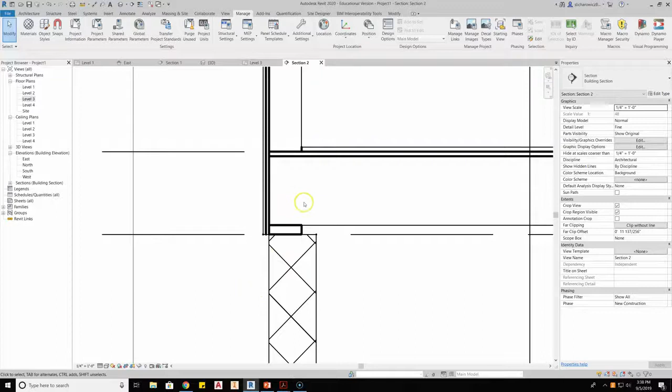Okay, in this video, I'm going to take you through how to set up a wall system and a floor system so that the wall and floor clean themselves up in a manner similar to that in which it would be constructed. So if you see here in the section view, this is our floor system, this is the floor joist. Then we have our subfloor that runs underneath of the wall.

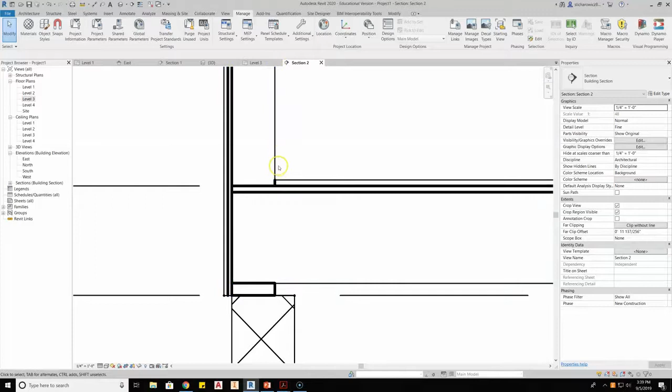Our wall comes down to sit with the stud, what would be the bottom plate, or the wall itself is sitting on the subfloor. Then our finished material is going to run across and stop at the stud layer. Now we can add a finish layer on the wall, and then these two would clean themselves up as well.

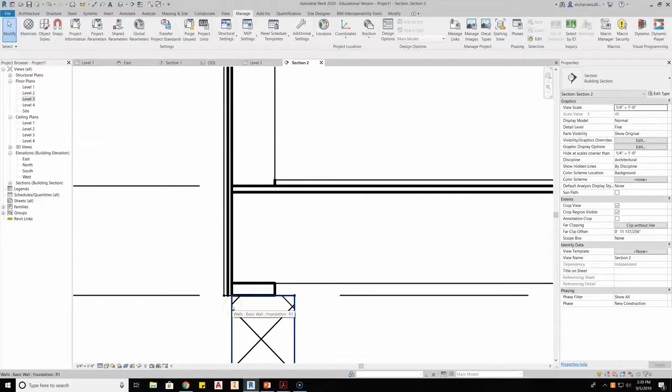But then more importantly, the outside, the sheathing layer, or OSB, is running down the wall, so that it is running down over the floor system and then down over top of the sill plate, stopping before the foundation, covering this up. And then of course siding is running down as well. So how do you go about setting this up so that you have a nice clean wall section?

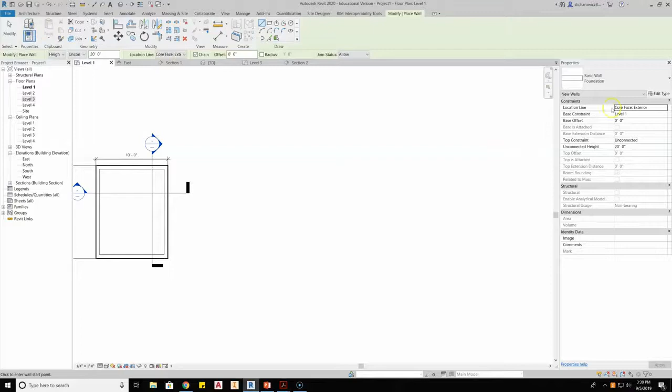So what I'm going to do is I'll run back here to my level 1 and just scoot on over here, and we'll draw this up here again. So I'm going to go to my architecture tab, grab my wall tool, and first grab my wall. I already have a wall built. We've covered building walls here before. We'll just take a look at the layers in my wall so we can see this.

And what I have here is siding, that clapboard siding on the outside. It's 1/2 inch thick. Then I have my OSB, and right now I just use the default standard 1/2 inch instead of a 7/16 for drawing purposes. And then the structural layer here, wood joist, rafter layer, batt insulation, is what I use for my stud for a 2x6 at 5.5.

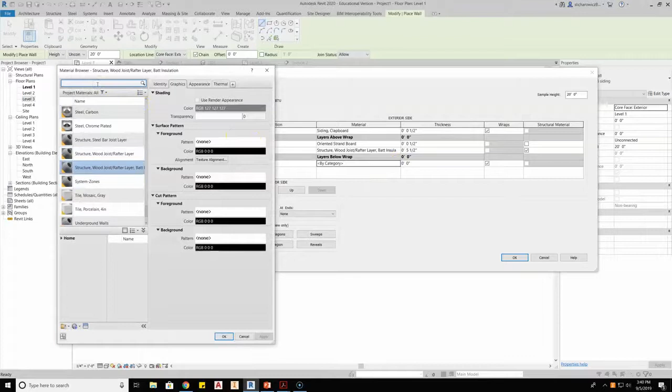And I'll just go ahead and add in one more layer here and drop this layer down, so if we wanted to show a finish layer on the inside of the wall, I can do that. I'll add a finish layer, and we'll make this gypsum wallboard. So we'll go find gypsum wallboard. There it is. And we'll make that a 1/2 inch gypsum wallboard. So apply, hit OK. Now we'll go ahead and just start drafting in our lines.

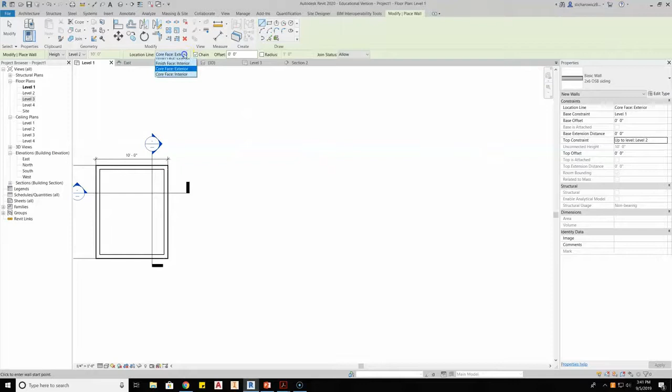And right now I want to set this up so that the base constraint is my level 1, and my top constraint is going to be my level 2. So that's set up. So now core face exterior is what I'm drawing by. So we'll just run out here 10 feet, and we'll just keep this pretty small, 10 feet all around, and clean this back up. So now I'm ready to start working with my floor.

And now I'll go back to my architecture tab, and I'll grab my floor system, and we'll do a floor architecture. And I had already altered this floor generic 12 inch so that I have some layers. So we'll jump into here and see the layers that I have. So first layer I have is a finish layer, and I didn't give any finished material to it. If I wanted to pull oak, I could do that, but that 3/4 inch thick is important.

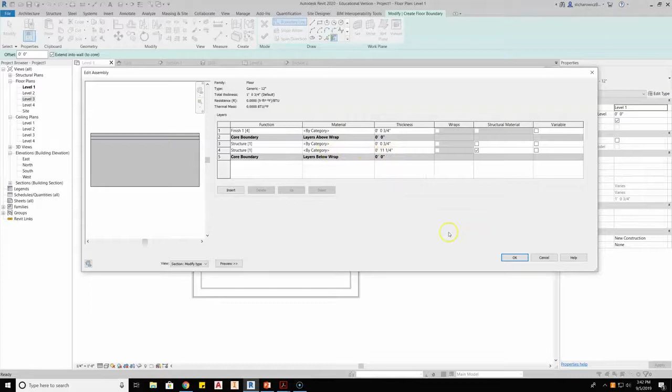And then the next layer, this would be my OSB, or my subfloor layer, sorry. My subfloor layer, and that's your 3/4 inch. And then my joist layer is 11 1/4, what would be a 2x12. So with that set up, we'll go ahead and start drawing. I'll just actually select the wall, so it grabs that.

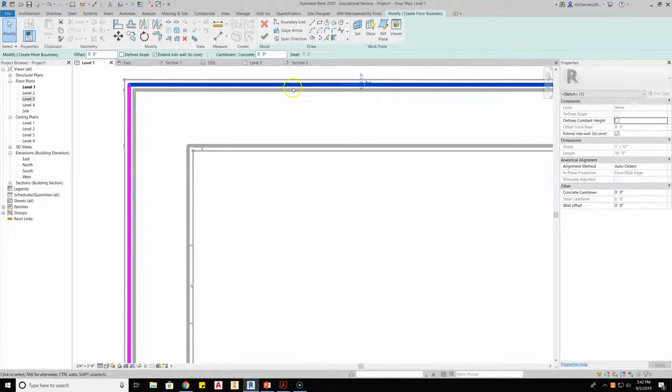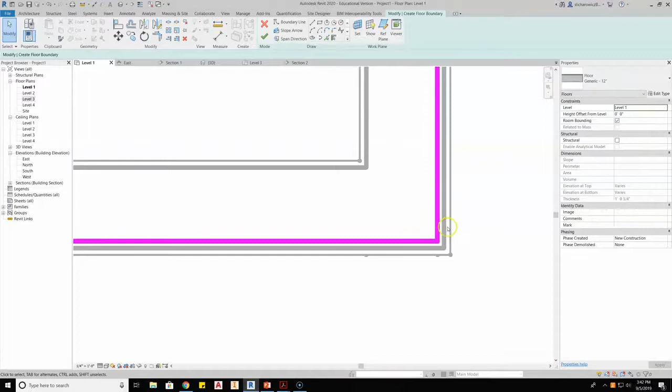But what I want to do now is come back in, hit escape here twice, and then grab this wall indicator line. I want to pull that in so it goes underneath of the stud. Do not want that over top of the sheathing layer, or under the sheathing layer. So I'll go to the 2 corners, and I will pull that in so it is between the stud layer and the sheathing layer on the outside. So it's underneath. So it's my sheathing and then my siding outside. So now I'm going to go ahead and hit the green check.

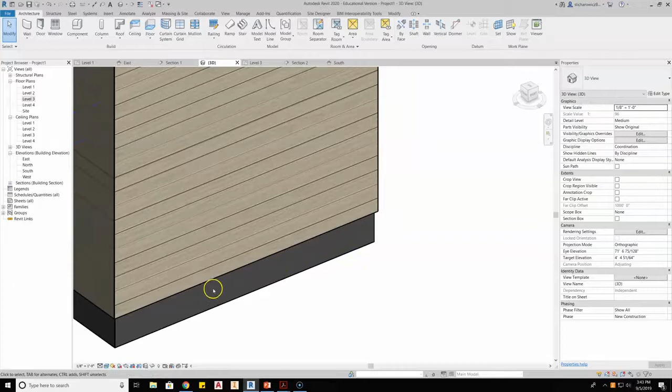Now with the green check, what this is probably going to set up is a pretty standard floor system. What I'll do is I'm going to go ahead and take a look at this, and you can see that I can still see the floor system itself underneath of my wall. And this is what we've done for years now, is then try to clean this up and how to handle that, because really the siding would run down across that exterior of the floor system.

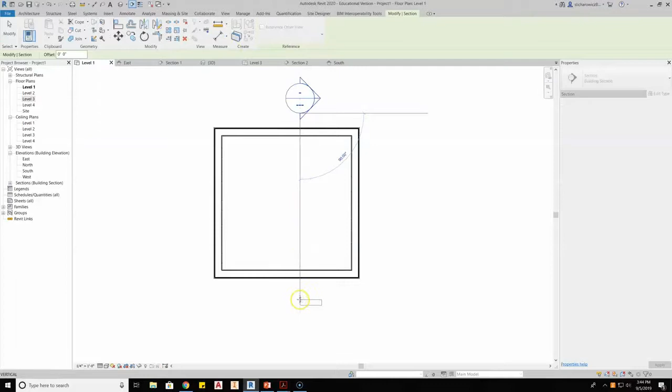So what I'm going to do is I'm going to run back to my first floor here, and I'm going to grab my view tab. I'm going to just create a quick section here so I can cut this building in half and pull this back. So I'm just making that section there. Let's go ahead and take a look at this, and we'll set my detail level as well, and you can see that the wall is sitting on top of the finished material. So again, that's not accurate either.

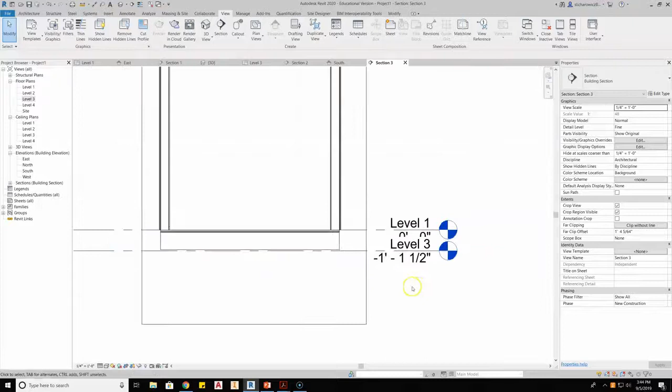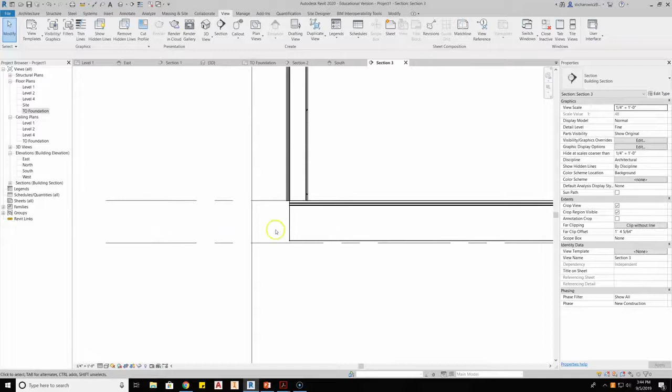So what we want to do is we want the walls to actually run down through to what would be, this is that level 3. And in fact, really, this should be called my TO foundation. So we'll go ahead and call that TO foundation, meaning top of foundation, because it's really where the end of my foundation would sit. And I'm going to have a sill plate in between the two of these. Okay, so we'll end up adjusting a few things with the height of the floor here, but we'll start working through this.

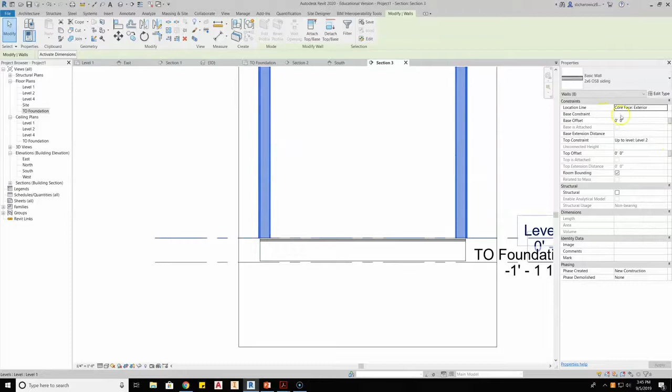So what I want to do next is I want to end up having all my walls apply and attach down to that top of foundation. So I grab one wall, I'll then right click, I'm going to grab select all instances in the entire project right now, and then I'm going to go ahead and set my base constraint. So my base constraint goes to the top of foundation. Come back inside the drawing, click, and now that drives those walls down through.

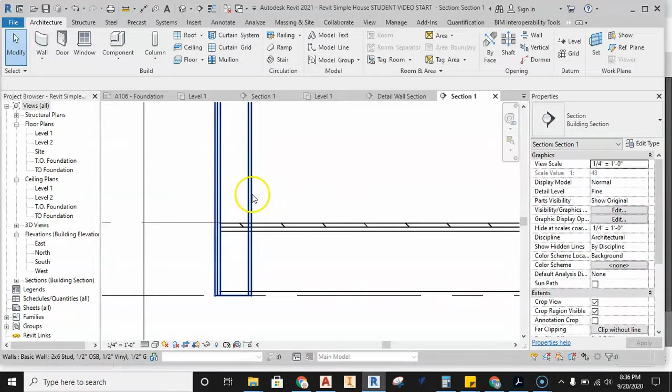So now what we can do to get the wall and the floor to join up and clean up in a proper manner is we're going to go ahead and select one of the two features here. I can go ahead and select the floor or the wall. What we're trying to do is get to that modify toolbar. So just go ahead and click on one of them, and then this modify toolbar opens up. And I'm going to grab this join tool. Now the join tool is join, unjoin, or switch join order. So what I'm going to do right away here is go ahead and click on the join geometry.

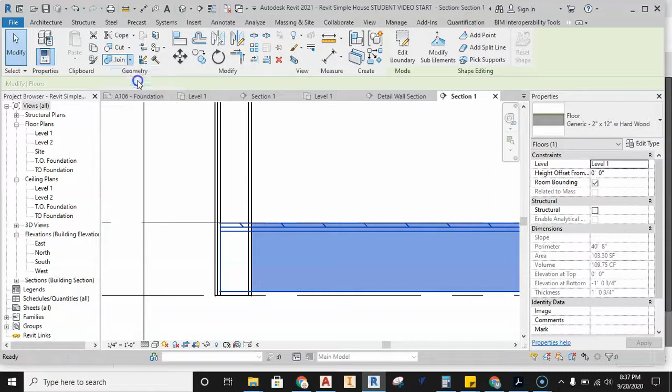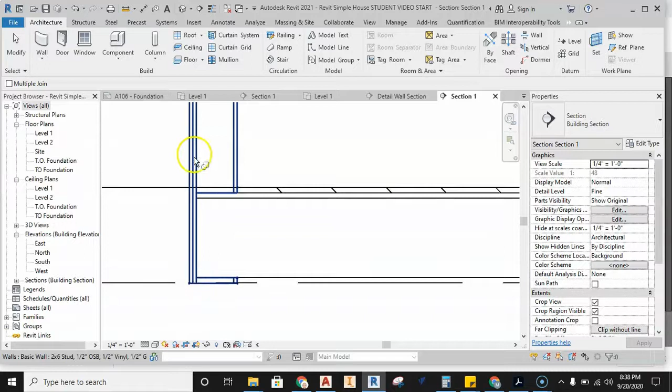And with the join geometry tool turned on, we're going to come down, we're going to select the floor, and then we're going to go ahead and select the wall. And you can see that it goes ahead and cleans itself up pretty quick, that the subfloor is now running underneath of what would be the wall sitting on the first floor. And then you can see that the sheathing and the siding are running down past. So we'll just go ahead, we'll do this to the other wall over here and go ahead and hit it that way. So that's the way you set this up in a section, where you join the walls in a section.

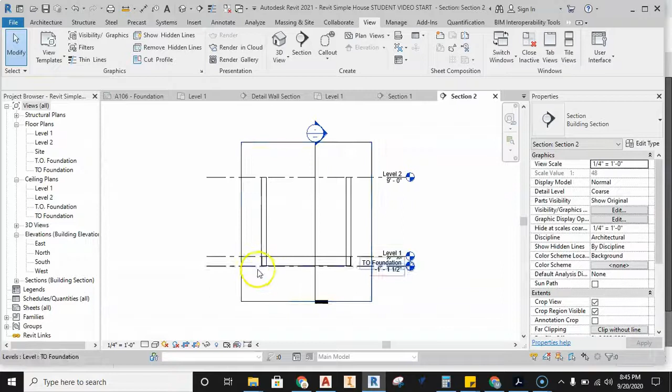What we can also do is jump back to our level 1, and I'll go ahead and create another quick section here. Pull that back. We'll go take a look at that section. You can see that these walls have not joined up. So we'll go ahead and actually make that fine. You can see these are running through here and these are running through, not cleaning up.

So we'll go back to that level 1. And if I'm able to select that floor, now what you might have to do here, this is the select element by face button. If there's a little red X down here, you've got to click on that. Then you can click on the floor. That's pretty important to do so you can grab a hold of a flat surface.

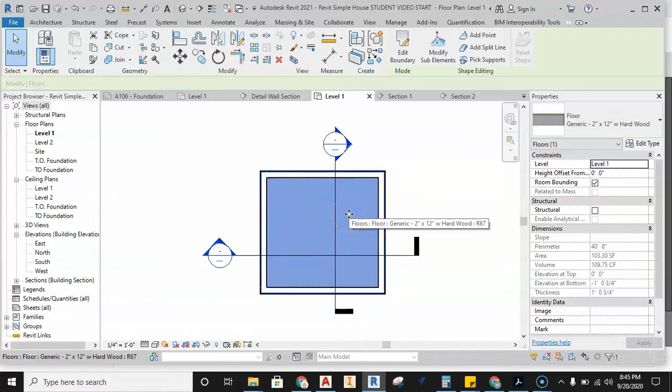But by doing this, I can grab the floor, I can then grab the join tool, and then I can go ahead and click on the wall and then the floor. And then what that'll do is set up the join for those walls without having to have multiple section views present. So you can see now in that section it is cleaned up.

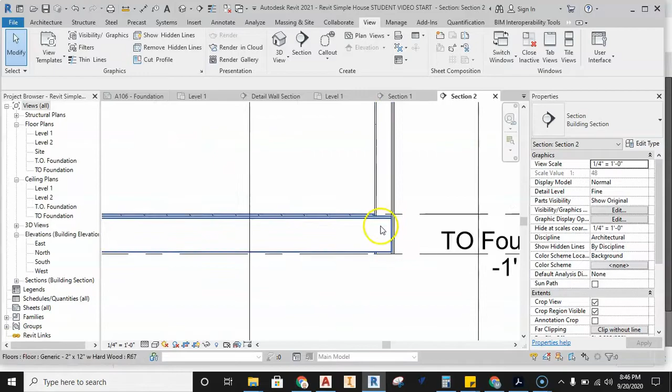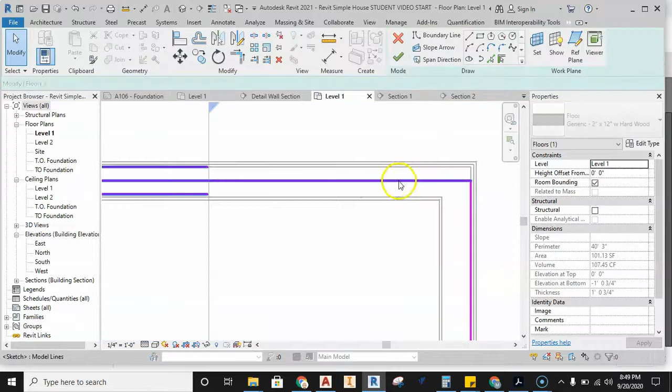Okay, and another way that you can actually work through this, you might see this, is if you were to, let's just say, select our floor here, and I hit the edit boundary button up here. And I go ahead and pull my boundary out and hit the green check, and then I'm going to go back and edit the boundary again. I go ahead and push this boundary back, and then I hit my green check again.

Then what will happen is you get a dialog box. And this is what I want to see pop up. Once you take those walls down through the floor, you get this dialog. It says the floor/roof overlaps the highlighted walls. Would you like to join geometry and cut overlapping volumes?

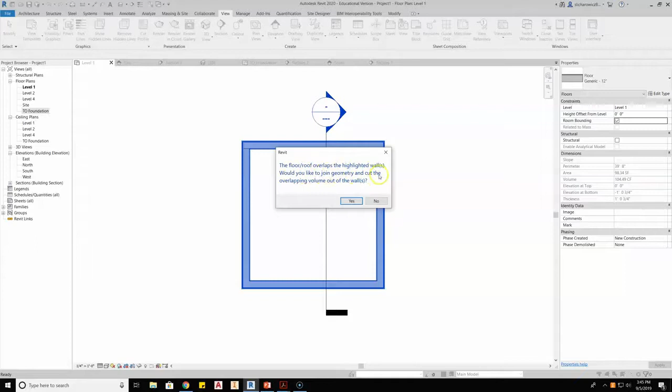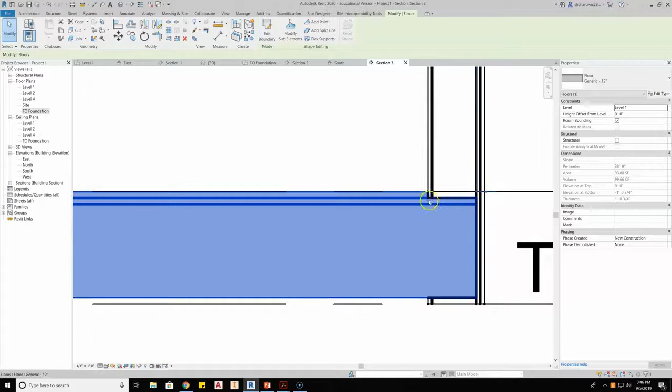Well, yes, I do. And what you saw me do here is I actually pulled my floor back out, really far out. Once you make a change to that bounding line, that's when you get that selection box to pop up. And you can see on this side, it's starting to clean up. You can see where my finish layer is already running back.

You can also see where the drywall finish layers are intersecting each other here. The floor itself, the stud is sitting on the subfloor, and then my siding and my sheathing are now running down past. So with that set up, let's go back in and set this side up properly.

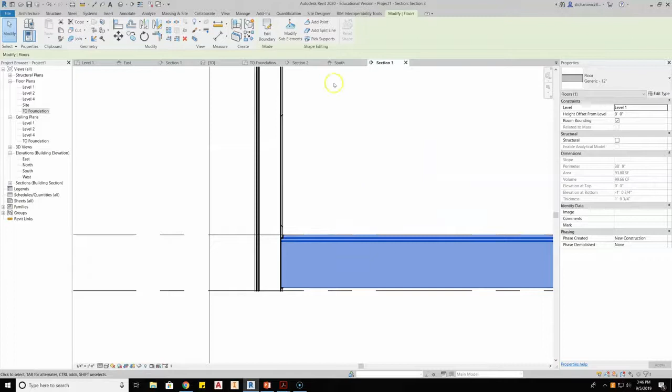So with it highlighted, I'll hit edit boundary. We'll go back into my level 1, and I'm going to take this bounding line and just drag that back out to the stud and sheathing intersection. Hit the green check. And since I'd already said yes to cleaning up the geometry, I now have that over here. So that's nice and tidied up.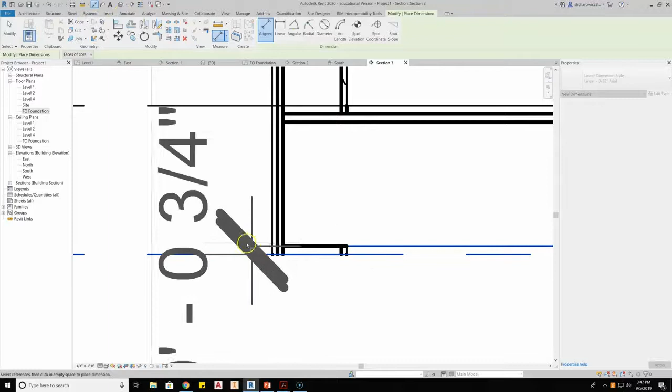So a few things here. If I'm looking at the space in this area, to get a sill plate in there, we would definitely need to have 1.5 inches, and what I have here is 3/4. So what I need to do to get this to be a little more accurate is move my entire floor system up the thickness of my finished floor, because really my level 1, or my 0,0 layer, is going to be my subfloor, not my finished floor.

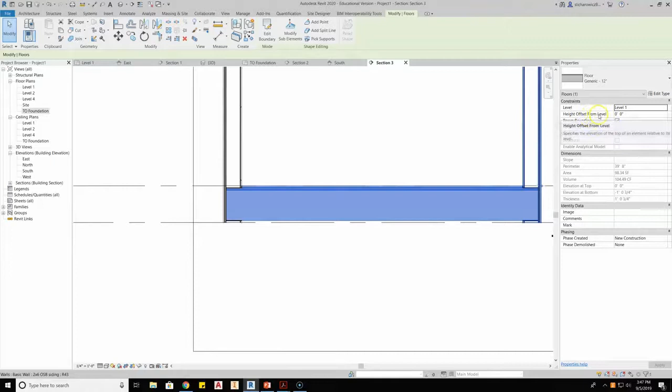So I'll go ahead and grab my floor system. I'm going to go over to height offset from level. I'm going to go ahead and bounce this thing up by 3/4 inch. Now you can see that underneath here I have a set distance. That's probably my 1.5 inches, and that's set up for my sill plate.

Now what we also see here when I select my wall is that although it's cleaning up inside where the structural materials are for the floor, it does extend down below here, and this is actually where the sill plate is going to sit. So we need to be able to pull up the stud, but if we do this, the whole wall moves. So what we need to do now is make this wall a little more adaptable. So we'll select the wall, and we'll go back over to edit type and get into editing the layers.

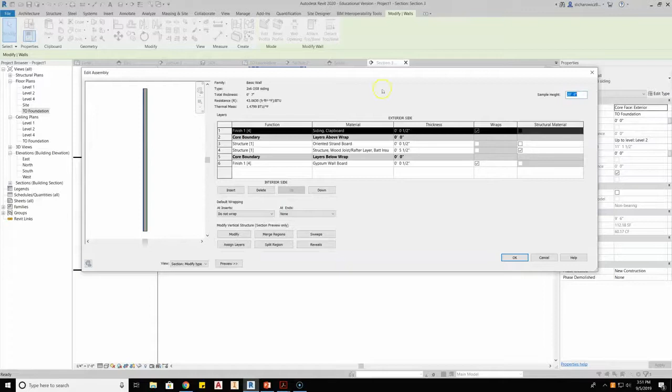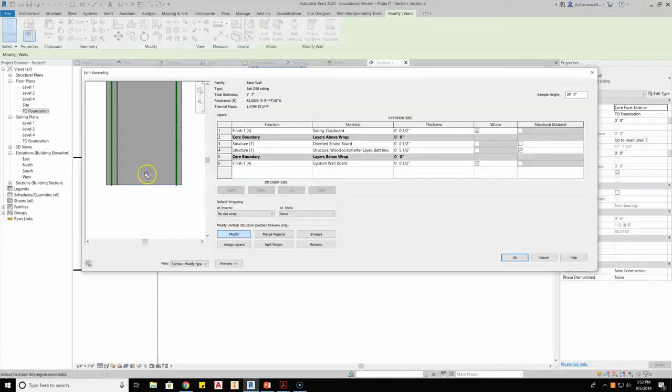And in here we're going to zoom in, and what we need to do is hit the modify button down here for modify vertical structure and hit modify. Then we need to select the bottom edge of this wall. Mouse over it, it'll highlight, select it. There's a little lock. If you mouse over this lock, you have to wait till it turns red and then select it. That unlocks it.

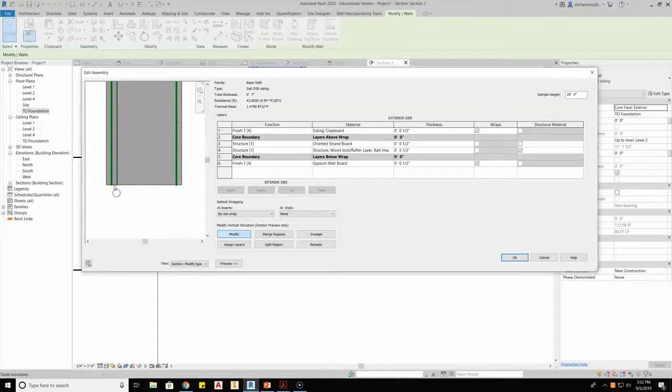So I'm going to do that for both the materials of the stud and the finished layer of the gypsum wallboard. So there it is, and it's a little tricky to actually grab a hold of this, and I'm going to click on it. So now they're both unlocked. I'm going to go ahead and leave these locked. So if I mouse over them, you'll see that's locked, and this is locked. So I'm going to leave the siding and the sheathing locked up here. So hit OK. We're going to hit apply, hit OK.

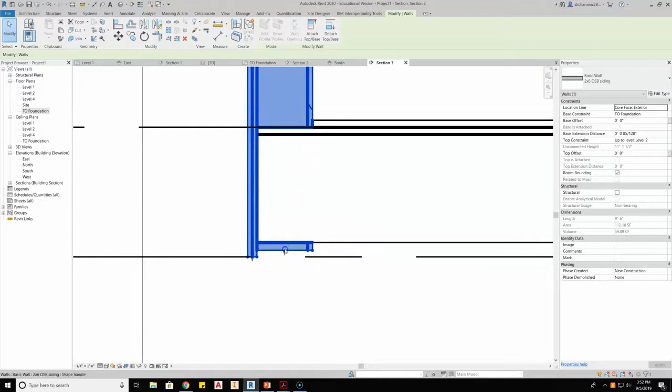And now when we select our wall, you can see that I have options here that I can actually pull this stud layer back up. So if I wanted to, I could actually pull the stud layer all the way back up to the bottom of the floor, which is one way to clean this up. Okay, and then this is now cleaned up here for me to go ahead and place my sill plate, which would then support the floor system from the foundation wall.

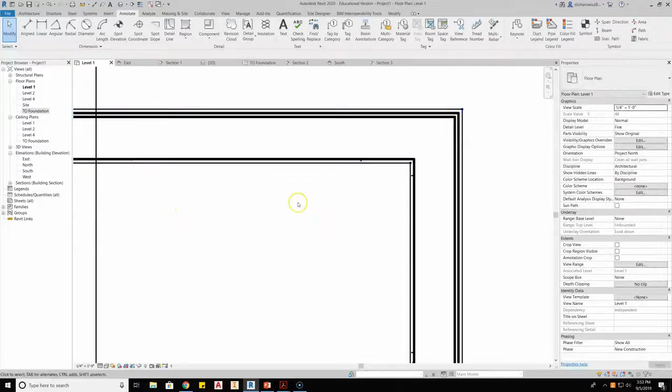So if I'm going to go ahead and grab that sill plate, I'll just go in here to my level 1, get into structural, go to my beam section, and we'll go ahead and load up a wood. Let's see here, we got to get into structural framing, and we're going to get into wood. Then we're going to go to dimensional lumber, and we want a 2x6, and we'll hit OK. So we got a 2x6 showing up here, and for now I'm just going to rough draw this in to the outside of my building.

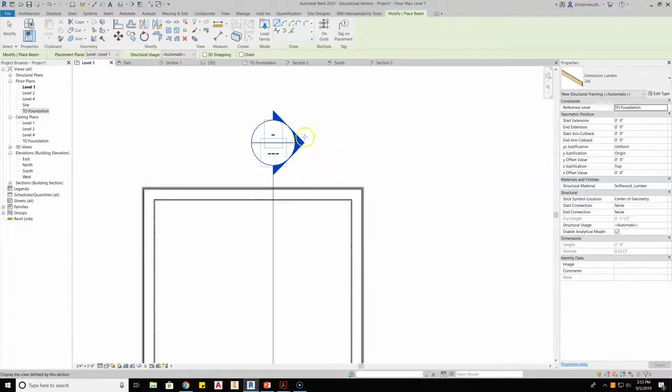I usually get a warning that says you can't see the thing, which is all fine and good. I'll go to my section view, and then it's sitting right here. So I select the sill plate, I rotate this by 90 degrees, and then I'm going to set up a negative offset of 3/4 inch, and I'll copy that into both locations here for start level offset and end level offset, and then I come back to the drawing, and what that does is it rotates it and drops it down, so instead of splitting a level, it is below it.

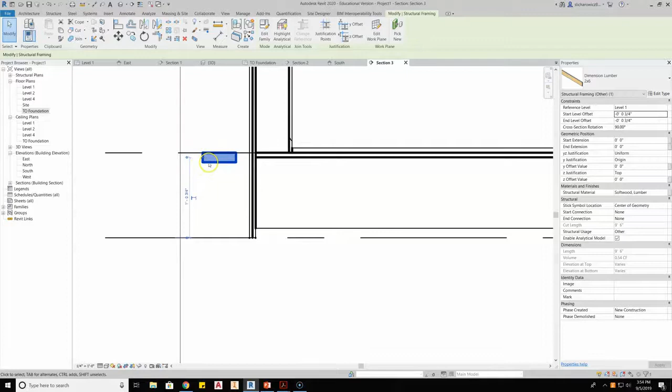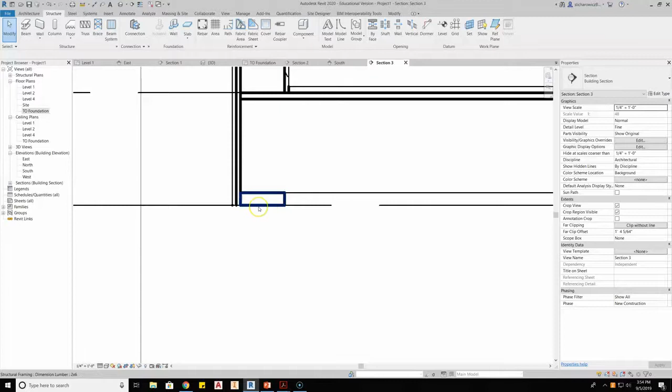Then I can go ahead and just take this thing and start moving it into position. Now at this point I usually like to use my move tool, so I can select a corner and take it to a corner so it is far more accurate in its placement. Then I can start thinking about, well, foundation. Now this is depending upon, am I going to run a CMU foundation, or am I going to set up a Superior Wall? Your Superior Wall would overlap your sheathing because there's an angle cutout on the Superior Wall, or your CMU is going to sit flush with your sill plate, which would be a pressure treated sill plate.

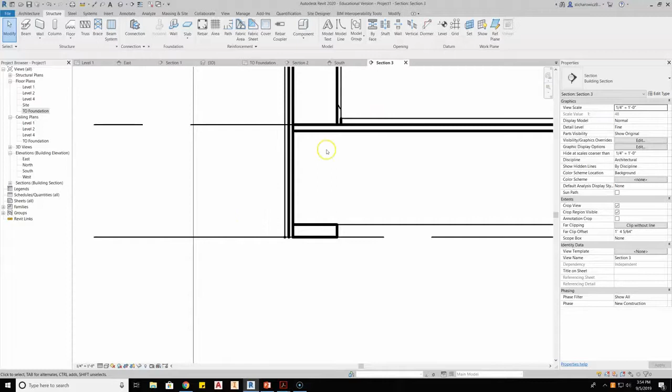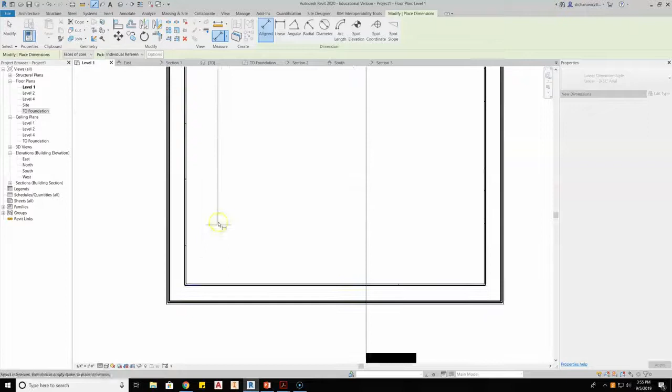That point comes down to the drawing, what you're trying to create with your foundation. So whatever foundation you're trying to set this up for, this is a great way to set up your wall system. And the other nice thing about setting a wall system up this way is you can still go back through, and when you want to annotate, you can annotate to that sheathing layer and grab the outside of the sheathing layer to give your overall dimensions for your walls nice and clean and even to that sheathing layer, and keep it moving. So hopefully this helps clean things up, and gives you a nice way to set up your exterior system.